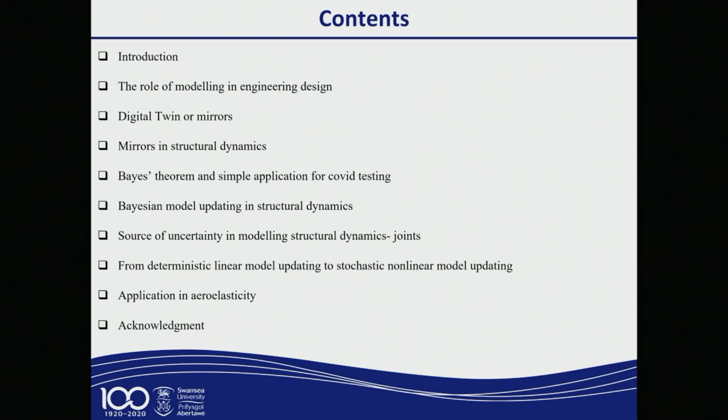I graduated from Sharif University in Iran in 2002, and I immediately was appointed as a vibration engineer. Sorry, I forgot to turn off my mobile phone. So, yeah, I started as a vibration engineer in an Industry Research Center.

I actually searched for a picture, and I found a picture of myself in 2004. This is about 18 years ago. What I was doing here, I hope I can explain in the following slides, but you can see me hammering a chassis frame with a hammer, which I will explain a little bit later.

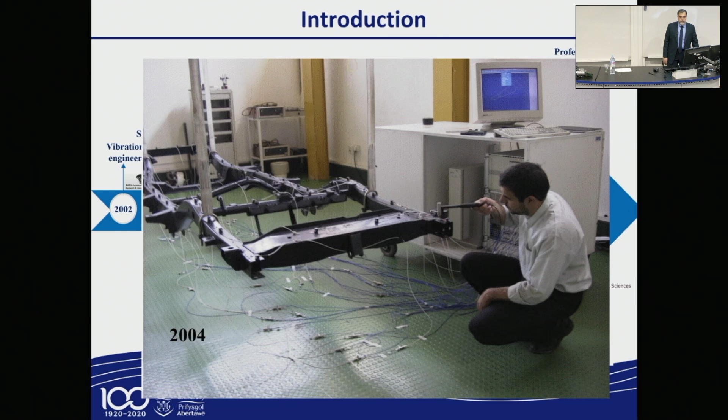I'm measuring basically the response of this structure, the chassis frame, with a system of data acquisition called LMS. I'll come back to this picture later, but I started my PhD in 2007 in Liverpool, working with the well-known Professor John Mottershead.

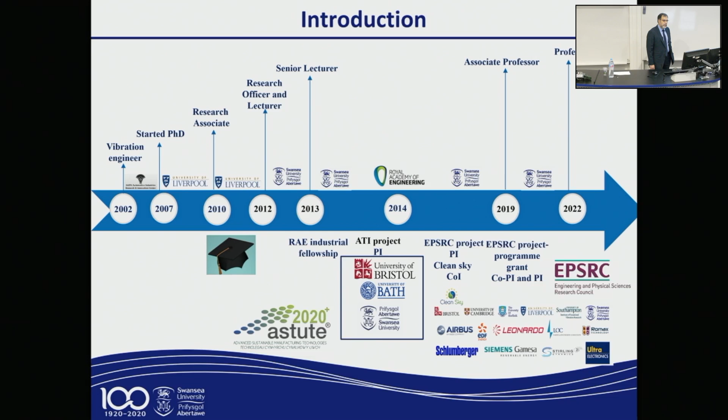And since then, I have been involved, I have won several grants. The most prestigious was the Royal Academy of Engineering Fellowship in 2014, where I worked with Airbus. More recently, I was co-PI and then PI working with Professor Friswell on the EPSRC Digital Twins for Improved Dynamics Design project. I was promoted to Associate Professor in 2019, and then this year to Professor.

Right, so before I start my talk, I would like to give you a little bit of flavor about what is the role of models in engineering design. What you can see here on the right-hand side is what we call the traditional V cycle, which basically represents a process of developing and testing a physical structure. This was called traditional because there is no modeling involved in this V cycle.

But you know that nowadays, like all areas of modern endeavor, engineering is also taking advantage of computational models in the engineering design and also over the life of the structure.

And that's represented in the left-hand side diagram by Dan Seal from Airbus, which is the concept of model-based system engineering, or MBSE, the diamond model. The bottom V is the traditional V cycle, dealing with development, delivery and manufacturing of the physical structure. What is added is the modeling, which can run in parallel with the delivery of the structure, and the circle in the middle shows the interactions between the model and the structure, used to inform the decisions an engineer makes about the structure using simulation and modeling.

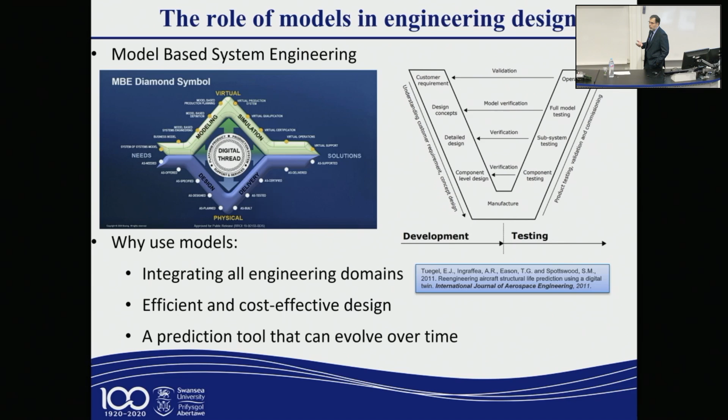The computational models can be used in all engineering domains, to improve efficiency and make the design much more cost-effective. It's basically a prediction tool that can evolve over time, and it can be used for different applications, such as structural health monitoring, where you can consistently check the health of the structure.

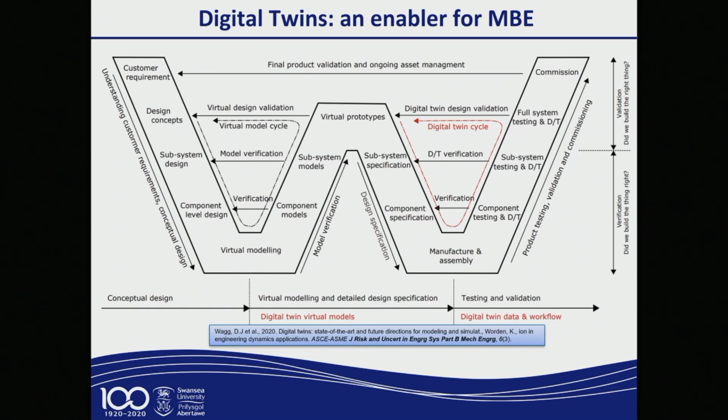There is a concept called digital twins that has been introduced for many years - I'm sure all of you have heard about digital twins. It can be considered as an enabler for model-based engineering design. The concept introduced by Professor David Wagg in this paper is to extend the V cycle to the W cycle, where you have the prototype design stage, and then use the digital twin model in the detailed design steps as a kind of cycle that informs again the decisions made about the models.

This is also shown in other concepts, but looking at the literature, there is no consensus about the definition of digital twins. There are lots of definitions, and every company, every university group will have their own definitions.

Perhaps the first use of the word digital twin was given in this paper by NASA and the US Air Force in 2012, when they introduced a digital twin as an integrated multi-physics, multi-scale simulation of a vehicle or system that uses the best available physical models, sensor updates, fleet history, etc., to mirror the life of a corresponding flying twin.

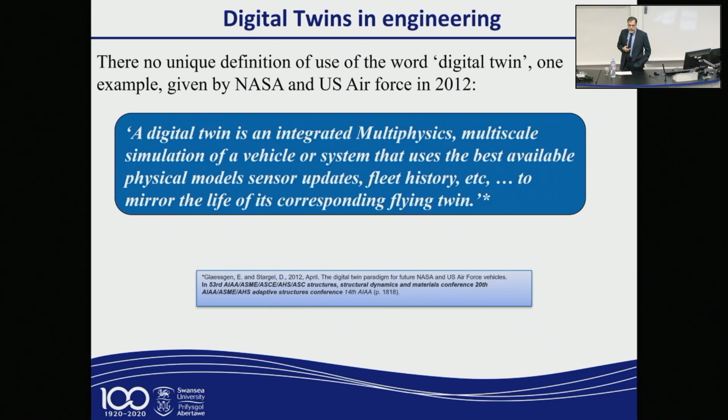And I like the word mirror here because I think that's a better definition for our application, as also introduced by Professor Keith Worden in his paper, suggesting to use the word mirror instead of digital twin. In this paper, Professor Worden has described a mathematical definition of the mirror.

That is, you have a physical structure that can be represented as S - this could be a car structure, any structure. Then you have E, which is all physical reality exterior to S. And then you have a context C for S for modeling some aspects of S, and also a schedule W for the context C. The important thing is that you have the response, which is coming from the physical structure, called T, and also the simulation, which is coming from the model.

So what is the mirror about? The mirror means that it only provides information about what is facing the mirror, what is basically shown by the mirror - nothing beyond that, and you don't get any more information. That depends on what aspect of the structure is going to be important for you.

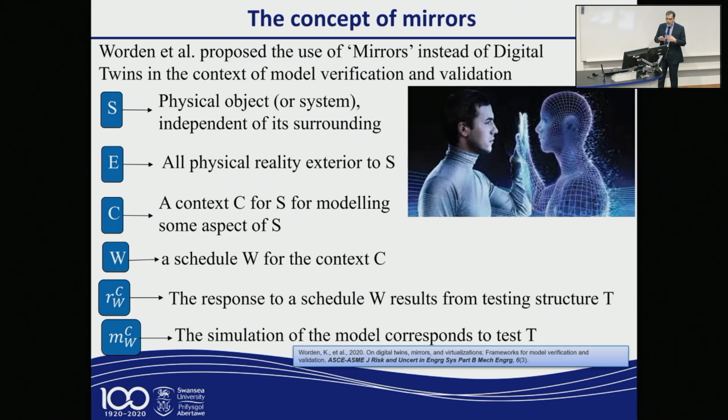To bring this into the context of my research, this abstract concept of mirror can be simply represented in this diagram, where you have a physical system. Obviously, there are environments that can change your physical system, and you have an input to the system, which I will explain in my application to dynamics and structural dynamics - what that input is.

On the other hand, you have the model, and the expectation is that if you put similar inputs to your system, the model acts like a mirror, reflecting what you see in reality. That's basically the idea of mirroring, and it's been developed since the 1970s.

The methods are called finite element model updating, validation, different names. The first book providing a good survey was written in Swansea in 1995 by Professor Friswell and Mottershead, who is now a reference in this area. It's a very common procedure in industry now to update the numerical model, and in terms of research, there's probably not much to add to what's available, since it's been used for many years.

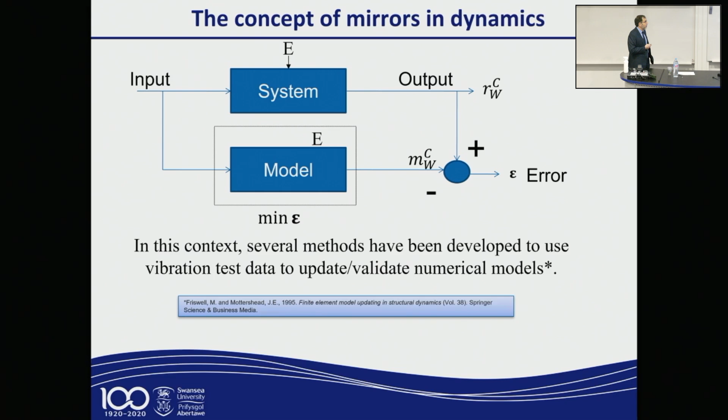Before I go through my research and how this concept is used, I showed you the first picture of myself, and now I'll talk a little about what we do in our vibration lab or dynamics lab. There are lots of works we're doing, but the simplest one is modal testing.

Remember the previous diagrams where I talked about input and output. Modal analysis and testing is a process where we apply a force to a structure and measure the response of the structure using an accelerometer. That's what we do in modal testing.

If we assume the structure is linear, which is more or less the assumption made in industry, then the ratio of output to input represents an FRF curve, the response in the frequency domain, which shows peaks at certain frequencies we call natural frequency or resonance frequency. These are independent of the input and output; they only represent the properties of your system.

The input could be a hammer or a shaker, measured by something called a force sensor. The output could be accelerometers, a vibration sensor, a laser displacement, or laser vibrometer - we have all this equipment in our lab. The important point is that if the structure is linear, these curves become independent of your input-output; the ratio is always constant and represents the properties of the structure.

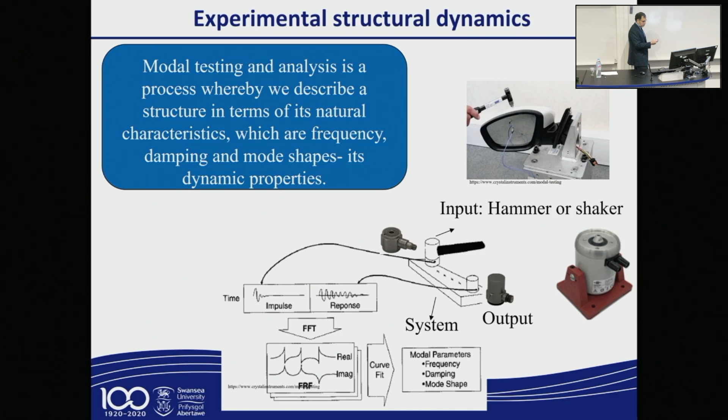Let me explain resonance frequency for those not familiar with structural dynamics. We have two types of force: static force, which applies to the structure without any frequency, and as you increase the level of force, you see more effect, like more displacement. So in the simple case, I apply a force here and get displacement, and as I increase the force, the displacement increases.

But the force could be sinusoidal, with a frequency associated with it. The level of force can remain constant, but the frequency can change. If you apply that force using a shaker to a simple plate, as you increase the oscillating frequency, at some point you see a great jump in the response - that's the natural frequency in the frequency domain.

Each natural frequency of the structure corresponds to a shape. Living in Swansea, a windy city, you probably see beams vibrating in the streets - that's basically the first bending mode of those columns around you, which is the first resonance frequency. As you go to higher frequency, you see more complicated shapes.

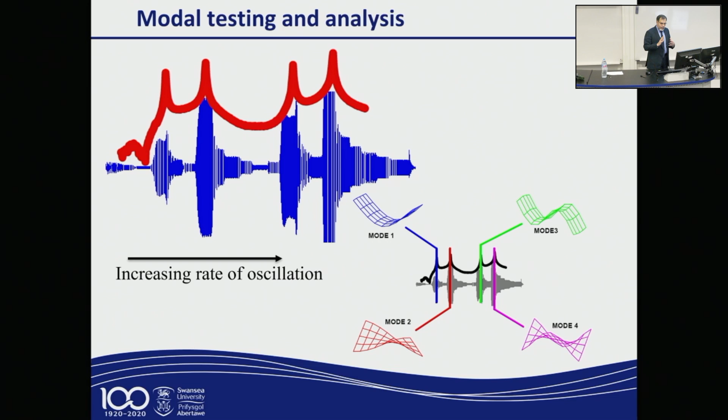Depending on the excitation frequency, these shapes can become more complex, but normally we don't excite structures with those high frequencies, so we only consider a certain number of modes in our analysis. That hopefully gives you a bit of understanding of what we mean by frequency and resonance frequency.

Now going back to the concept of the mirror and its application in model updating: you have a physical structure, and we can test it. Obviously there's lots of uncertainty associated with those tests, so you have to repeat the test. But normally, if you assume a single structure tested in a controlled environment, controlling temperature and everything...

So you expect, for example, if you measure only two natural frequencies, only one point in the plane of the first and second natural frequency - that's what you expect.

Obviously, in reality, you have to do a lot of statistical analysis to end up with this one point. But let's agree that this point is representative of the first and second natural frequency of the structure. So now we want to make a model which basically represents these test data.

And obviously, we use our knowledge. We make a computational model of that real structure, and we simulate the real structure, and we get a point in the same plane, but not at the same location as the real structure. Now the question is, what did we do wrong in terms of the modeling that we see these discrepancies?

That's basically the question that's going to be answered by researchers in different ways. Obviously, the computational modelers always say we increase the fidelity of the computational models, and we can then include more physics to basically minimize these discrepancies. But that's not always the case for all applications.

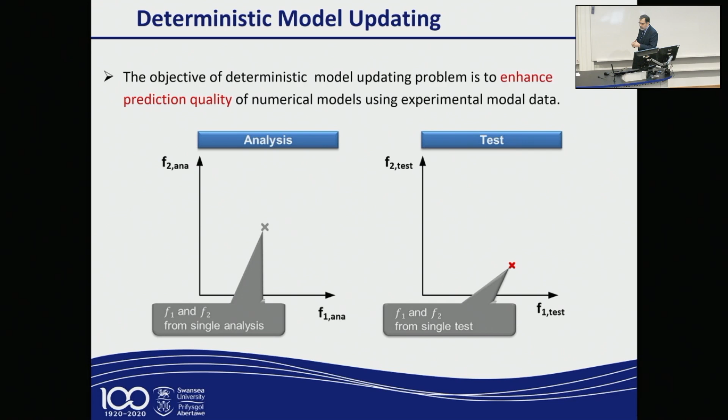What was my contribution during the PhD and postdoc was developing methods to consider multiple structures. So I mentioned that we consider not only one structure. If you consider a car coming out of a production line, or an aircraft structure, you don't have one car, you have multiple cars, all with the same design, and they all try to manufacture it in the same way.

But eventually what you see, if you do the test, minimizing the uncertainty for every single structure, you don't end up with one point in that plane. What you get is several points. Moreover, this structure is supposed to work in different environments. So you make an aircraft, and it's going to fly in different countries with different environments, and those environmental parameters will also change your structural parameters.

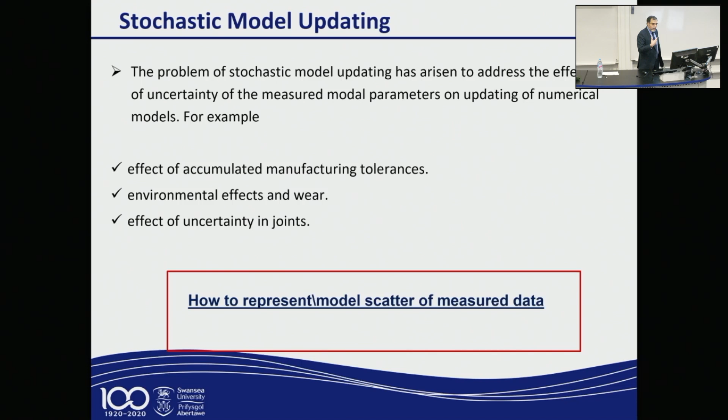So the question I basically tried to answer was, in the same plane we now have multiple points, which we call the clouds of frequencies. This could represent the variability not only due to the different multiple structures, but also due to the environmental variability. Now you have to make your model which predicts these scatters.

And this is where we introduce stochastic model updating, that's where SMU comes into play. This paper, written by myself, Professor Mottershead, and Professor Friswell in 2008, was one of the first papers which described this concept. The objective here is not only to minimize the center of these clouds, but also to minimize the size and the orientation.

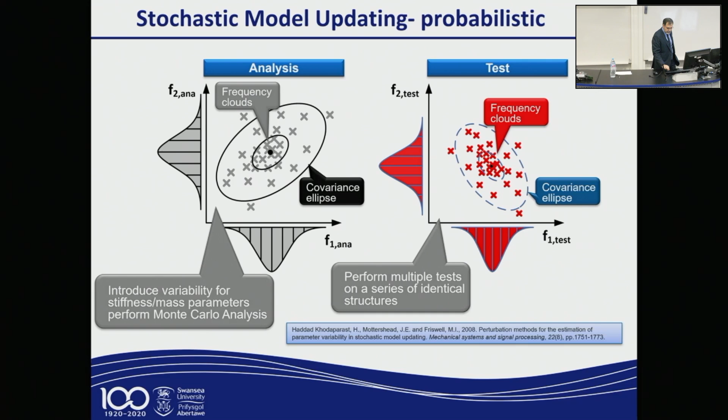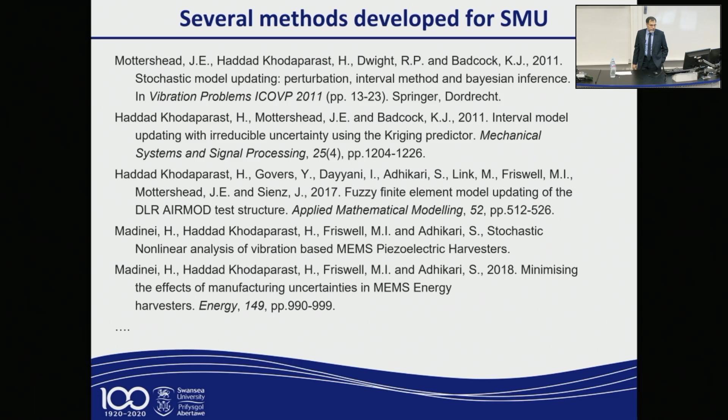This involves a bit of detail in the statistics, and I'm going to just skip that. There have been many methods developed for stochastic model updating, mainly for linear structures, and several papers have been published. Some of them are from us, but many from other institutes.

But amongst all those methods that have been developed, Bayes' theorem proved to be the most powerful technique in our application, which has also shown to be very useful in other applications. But because its theory is probably a bit out of scope for my presentation today, I'm going to give a very simple example that I used in 2020 for a COVID-19 application. It's not engineering, but hopefully it gives you a bit of understanding about the concept.

And based on that, you can improve your confidence about the probability of that proposition. I'm going to say this in a very simple way, using the example that I did and sent to NHS.

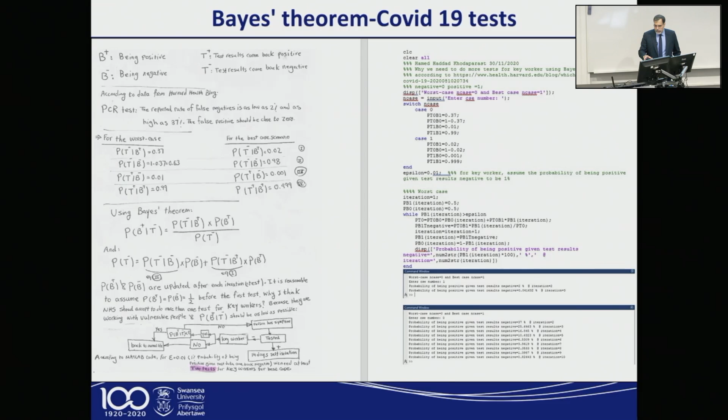So I defined 2 scenarios: one is the worst case, and the other is the best case. I did all these calculations, which are simple, and I'll show this curve, which is the important one and very intuitive.

It's basically saying my starting point before doing any test is 50%. When I do the first test, in the worst case scenario the probability of false negative reduces to 37%, because this is only based on the information available. In the best case, it reduces almost to 0. So NHS always takes the best case.

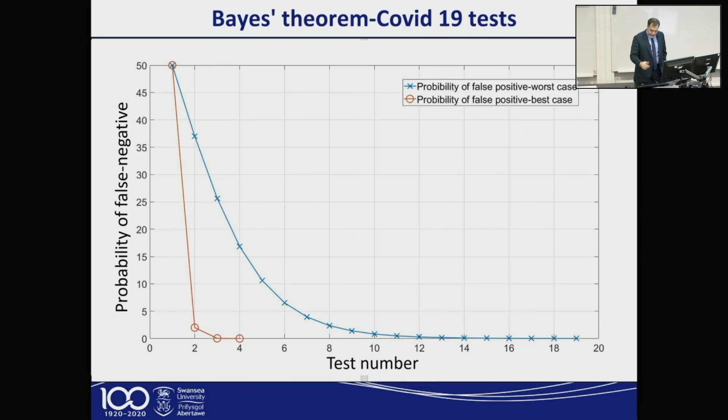But if you take somewhere in between, let's say here, then probably we need at least 1 or 2 tests to reduce this probability of false negative to a reasonable value. Hopefully that gives you an understanding of the concept of the Bayesian theorem.

In our application, going back to this slide, we use this for experimental test data to improve the probability of the parameters that you assign into the stochastic model that predicts the probability of the measurement data. So that's the whole idea, to give you the big picture.

And this is the equation. I promise I won't go into any detailed equation. You can see it's a similar equation, but the application is in engineering and structural dynamics. The pioneer of this idea is Professor Beck, who introduced it in his first paper, but our contribution was extending this method to the case of SMU, or stochastic model updating.

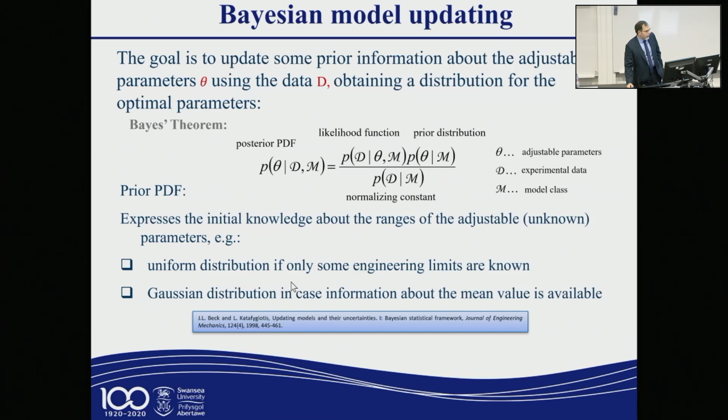There are some slides here about how to estimate your prior and how to calculate it. Obviously, when dealing with models, you can't just use simple calculations like multiplication. You need to use computers to calculate all of this analysis.

I just show here some of the things - for example, to identify the posterior, we normally use the MCMC method. The posterior and prior, again, I have to clarify: the prior is what you estimate, and the posterior is basically the improved probability. You can actually do this in an iterative way. Okay, so let's move on.

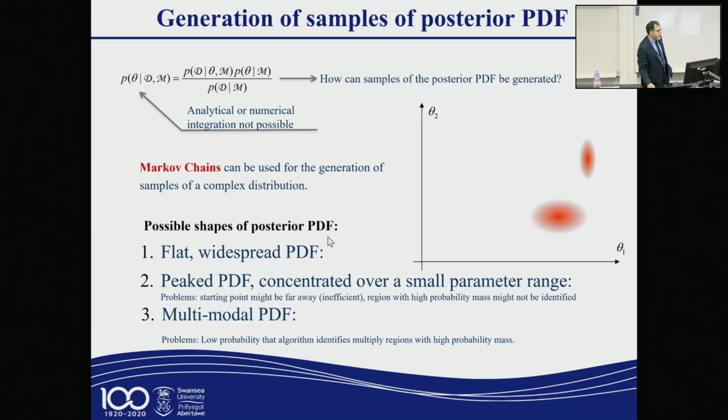I'm going to show you some of the results that we got from these methods that we have developed. This is a collaboration with German Aerospace Center where we wanted to demonstrate the application of the methods that we develop in this area.

When it comes to academia, we have limited resources, so we can't really test a very complicated structure. We have to make benchmarks to test our methods or ideas. This is what is called the DLR AIRMOD structure.

What they try to do is see what would be the effect of different sources of uncertainty in the vibration test data. They found that assembling and reassembling the structure will have the maximum effect on the variability. What you can see here is some data on the natural frequency that I mentioned.

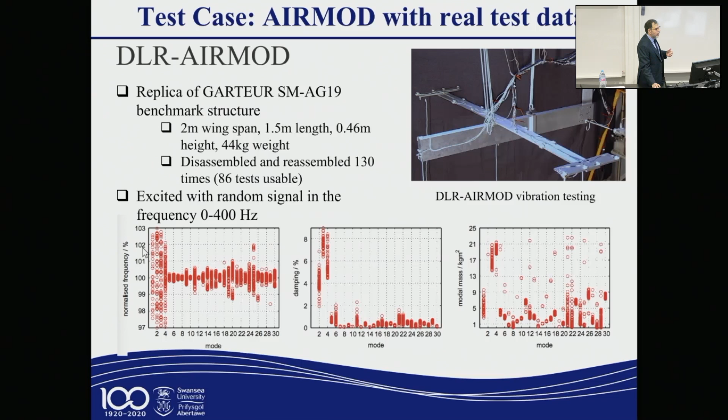In reality, every structure has an infinite number of natural frequencies. But as I said, in reality we're only dealing with a limited number of frequencies, in this case 30. You can see the variability due to the assembly for different assembly and reassembling of the structure.

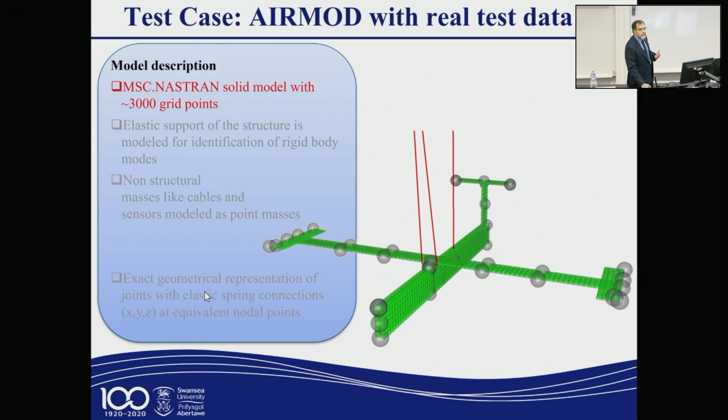We now have a model which mirrors or reflects the physical structure. We assume that there are some parameters within this model that we are not sure about, and we want to adjust them using different methods that we try.

When you do the experimental modal analysis, you can extract the mode shapes. These are the mode shapes of these aircraft structures. Every structure has its own mode shape. That's one of the analyses that is carried out in reality.

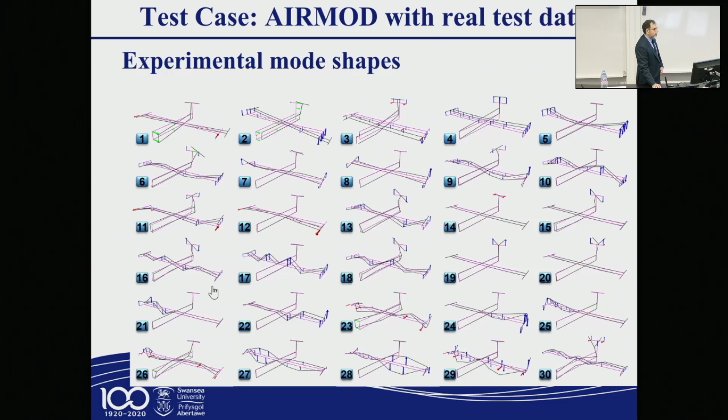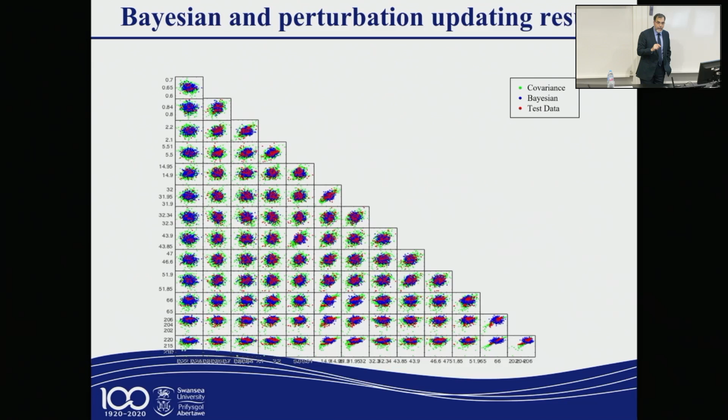As I said, in this one we use 86 sets of measurement data for the methods that we develop, and we demonstrated that the method can predict the scatter of the data from the experiment very well, both covariance and Bayesian.

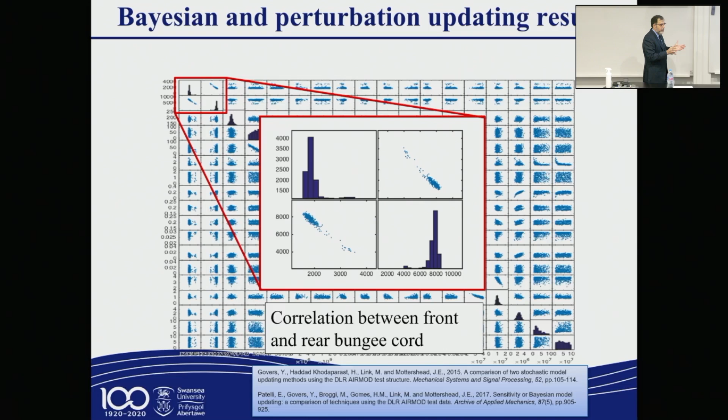The advantage of the Bayesian approach is that you can also see some things in the input parameters, the probability, because the perturbation method that I developed could only show the range, the variability in the parameters. But with Bayesian, you can also identify the probability of the input parameters in the model. That becomes very important, especially when you have bimodal behavior.

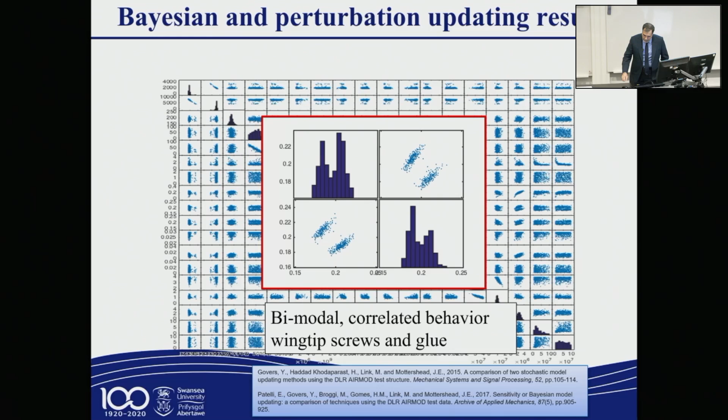I mentioned about the joint. As I said, there have been many methods developed in the past decade, and it's mainly concentrated on improving the efficiency of these methods.

But one of the questions that always remains in the literature is: where is the source of the uncertainty in different applications? Where does that doubt come from? In our application, obviously, we know that a structure is made of different parts, and they all get assembled. This assembly process can bring variability in the results.

But also, when you have joints in the structure, which are simply represented here, the joints can also cause nonlinearity in the response. I talked about the linear response, where the output to the input ratio remains constant. But when you have nonlinearity, that constant assumption is no longer valid.

What will happen is you have some phenomena like friction or slipping between the surfaces, or you can have separations between the joints. All those phenomena can create nonlinearity, and this nonlinearity will result in input-dependent natural frequency.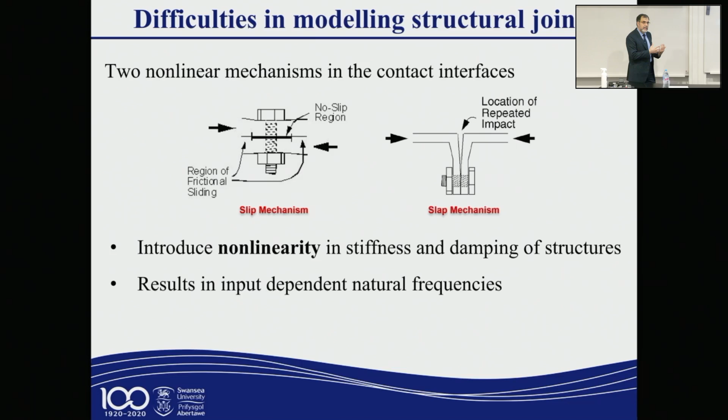With my colleagues and my PhD students, we have published several works on what we call deterministic methods. Consider that now the response for a single structure, instead of one point for one frequency, is a number of curves which are called backbone curves.

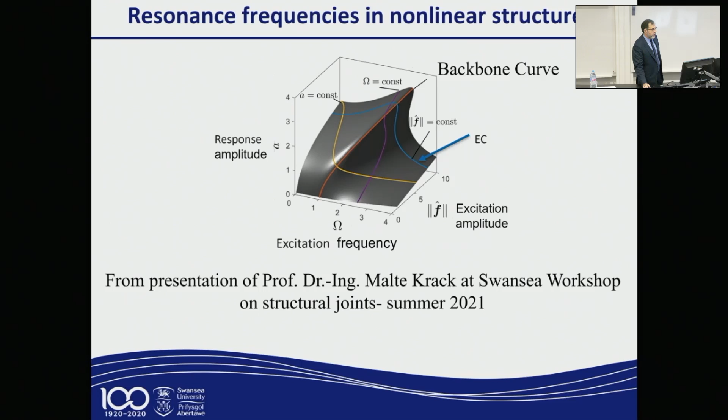And now you have to use this backbone curve to modify or identify the nonlinear model in the structures. These are a list of papers, not just us, many other groups working on it, to develop methods for what we call deterministic nonlinear model updating. And it's still going on.

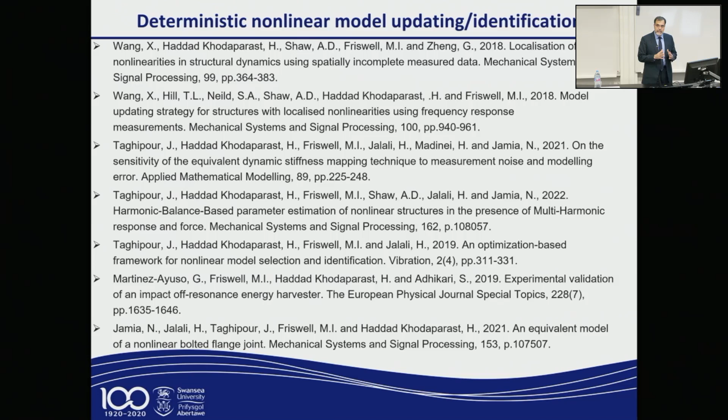But in my EPSRC project in 2017, we actually said it's too early to move into nonlinearity, and we still have a lot of lack of knowledge, even in the linear structures with the joints. Because I mentioned about the difficulties in modeling of the joint structures.

And the reason is because you have a randomness in the asperities contacting the two surfaces. This randomness could be completely different from one structure to the other, and it's almost impossible to model this at the microscale. So we proposed the idea of making an equivalent model which can represent this randomness in the microscale, but still dealing in the linear region.

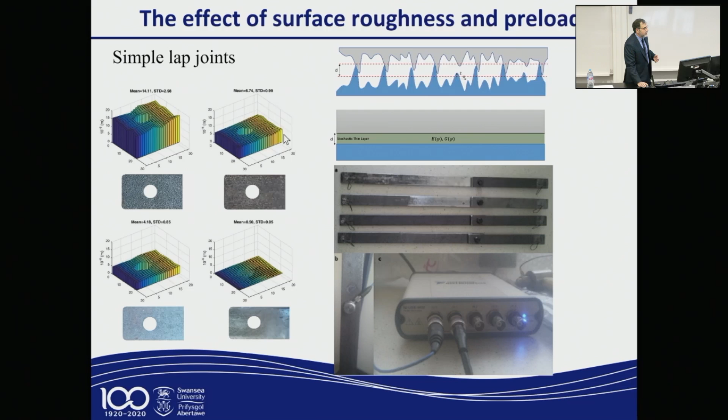And in order to test this idea, we made 4 surfaces. Again, we have limited budgets - it's better to make as many as you can, but that's what we could do. 4 structures, with different surface roughness that we could measure, and we did the experiment.

And apart from the modeling, which I'm not going into the details of, we could see great variability, not only in the frequencies of the structures, but also in the damping ratio, which is also another important aspect. We published a paper in JSV, one of the most prestigious journals in the field.

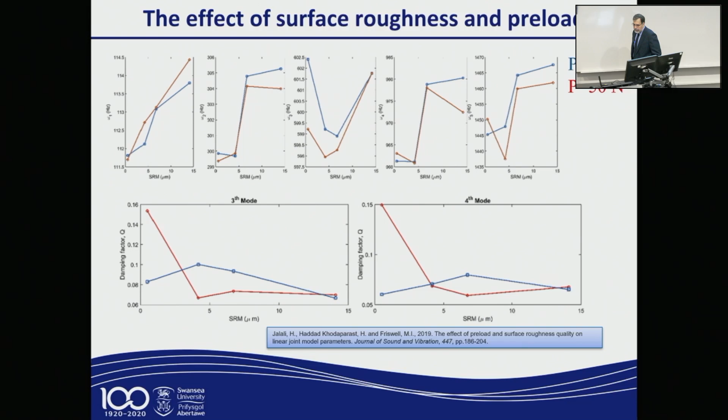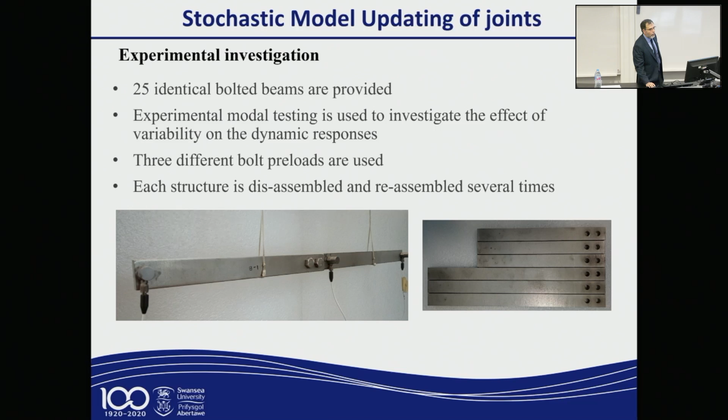And that work was continued by basically doing this experiment on a different set of structures, with 25 different combinations of these simple lap joints, still assuming we only excite the linear modes, and changing the preloads on the structure and repeating the hammer test.

And that's like 75 tests, but not only 75 tests, because every test has averaging. So you have to imagine every test takes at least 10 averages. Hadi here in the lab was there during those times to do all these tests, and it took about 20 days to complete.

And this data, coming from that exercise, is quite useful because it shows the frequencies of this simple structure, but not only the frequencies, also the scatter of these frequencies. And you can imagine these results are quite intuitive, because as you tighten the bolts, you stiffen the structure, and the stiffness increases the natural frequency. So you can see the center of this scatter moves and shows the increase.

And that's not something to surprise, but you can also see that the level of variability and uncertainty reduced - as you can see, the size of this scatter reduced. And these are real experimental data. It's nothing from the model.

On the other hand, we saw something in the damping: by reducing the preload on the joints, the uncertainty, or variability, in the damping ratio will increase. And as you tighten up, the variability reduces.

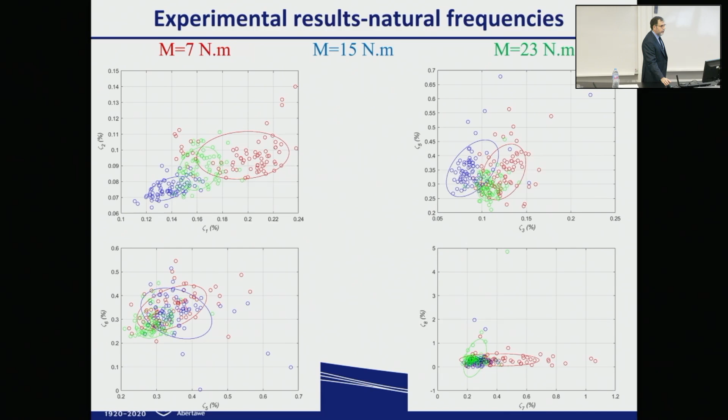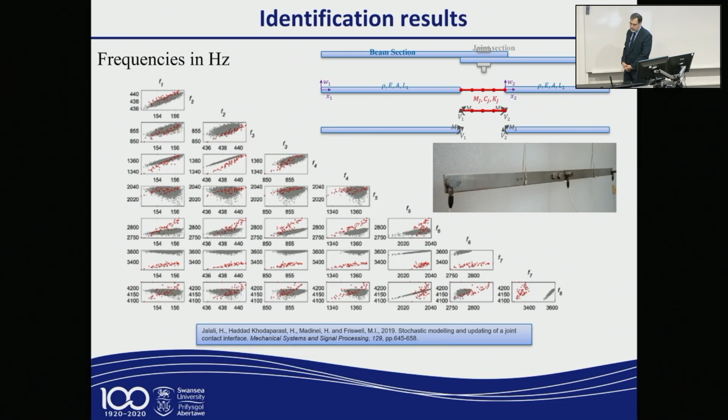And we basically said, okay, we can use the computational model and the Bayesian updating approach, and we showed that the method can work well, especially in the low frequency regions. We published another paper in MSSP.

So I'm going to talk a little bit about the work we are recently doing on this. As I said, with Dr. Nidhal, who is also here, a research officer at Swansea University, we have done a lot of work on modeling nonlinearity and also identifying the nonlinearity in the joints.

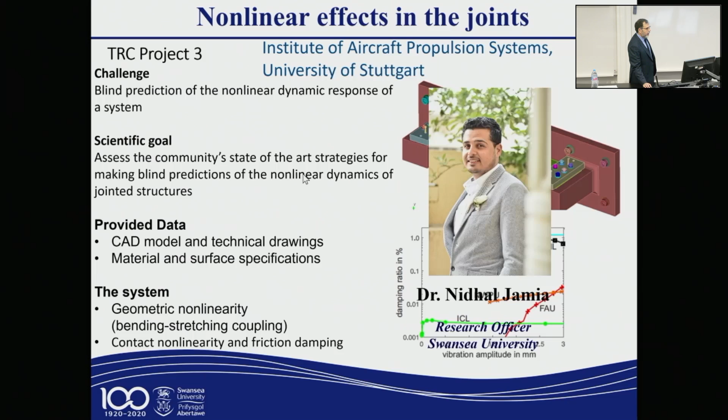But this was quite an interesting exercise, designed to show the level of uncertainty in the modeling of even a very simple structure, like the one you can see here. So what was the task? The task was basically designed to do a blind prediction of the nonlinear dynamic response of a system.

So what you can see here is a simple plate bolted and clamped at two ends. The goal was for different institutes, including Swansea University, as part of the structural joints community, to perform their own modeling with the given data and provide estimations of the damping and frequency. We only reported damping here, and you can see great variability in the damping estimates from different institutes. It shows that the level of confidence we sometimes have in the model is quite low, especially for a very simple model like this.

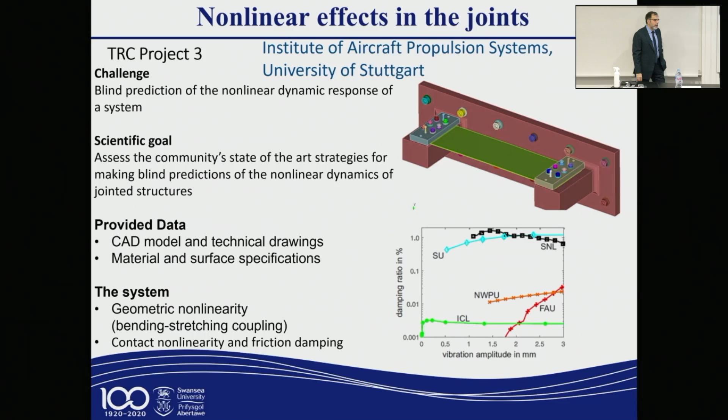Obviously, the one that used a very detailed model was Sandia lab. Last month, several researchers from us, including Dr. Nidhal, went to Stuttgart and spent about a month doing a lot of interesting experiments. This is the test rig shown at their institute, and I think we are trying to make something similar in Swansea at the moment.

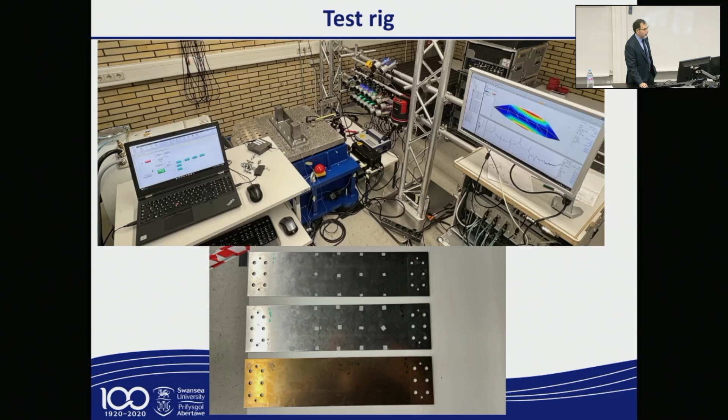The idea is that we now measure the mode shapes. You have three different plates attached here, and you can see all the sensors used for measuring the modes and natural frequencies. But what's important here is that these are all experimental data, and what you can see is something called a backbone curve.

The natural frequency, W hat, is plotted against the base level of the base excitation. So instead of force, you increase the amplitude of the base excitation, and as you do, you should see some nonlinearity. Initially, the natural frequency reduces because of some friction and loosening in the stiffness, but then the geometric nonlinearity, which is a hardening nonlinearity, becomes dominant and you see an increase.

But in the frequency, you can see in the linear regions there is still variability across the three structures, and that level of variability increases as you go to higher levels of input excitation. The same happens with damping, except damping is always more uncertain because the range of variability is always quite big.

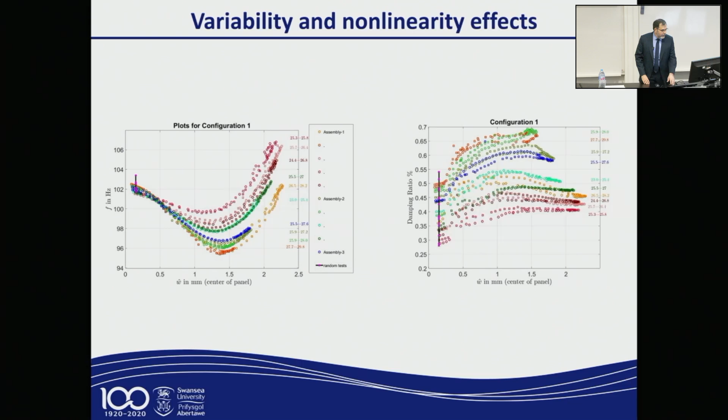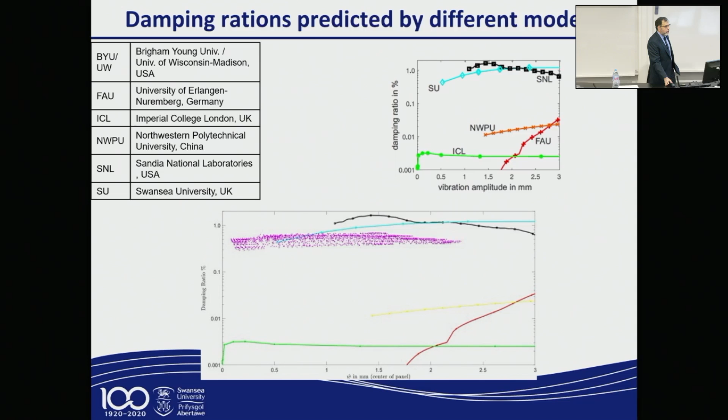But what you see here is not a single curve. I mentioned that what we're doing now is deterministic nonlinear model updating, trying to develop a model that represents what we could call the mean. But in reality, this scatter in the nonlinear regime is meaningful. The idea now is to develop methods - and this is current research that many groups are working on, not just ours - to predict also this variability in the nonlinear region.

Pushpa Pandey, who is also here, is working on this idea. We came up with defining the likelihood function in a Bayesian approach by fitting a PDF at different locations on the backbone curve. Pushpa actually presented this work two weeks ago at ISMA in Leuven, for the first time presenting her work there. We showed some results, but not using experimental data - only simulations, which we used to produce data to show that the method is working.

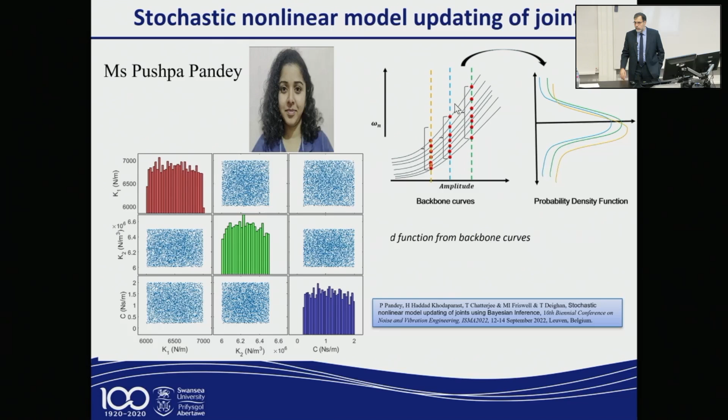So that's all about structural dynamics. Now I come to aeroelasticity, which is also my interest. This is work we did with Airbus and also in Swansea University wind tunnel. Davide Balatti, a PhD student - his name is Balatti - started this idea while at Airbus.

We now have lots of advantages from high aspect ratio wings - it can save fuel and significantly improve the lift over drag ratio. But there are limitations at airports, because as you increase the length of the wing, the aircraft might not fit in many places. What you need is a folding wing, so once you land, you can fold the wing and fit it wherever you want.

The idea started in Airbus, to say why not assume the winglet can basically move when the aircraft encounters gusts. The gust is something you all probably experience in an aircraft - you experience the effect of turbulence, which is not really pleasant. It's quite annoying, and as a designer you would like to minimize those effects on the passengers. You need something like isolators to remove that.

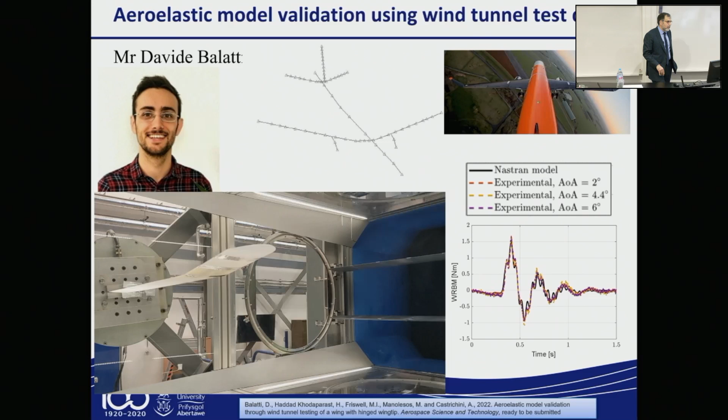This is the demonstrator here. On top of this we have laser sensors which measure the displacement at different locations. It's been shown in many applications that this can work, but as I said, it's mainly still at a low technology readiness level - it's not something we can build in yet. There's still a lot of investigation going on.

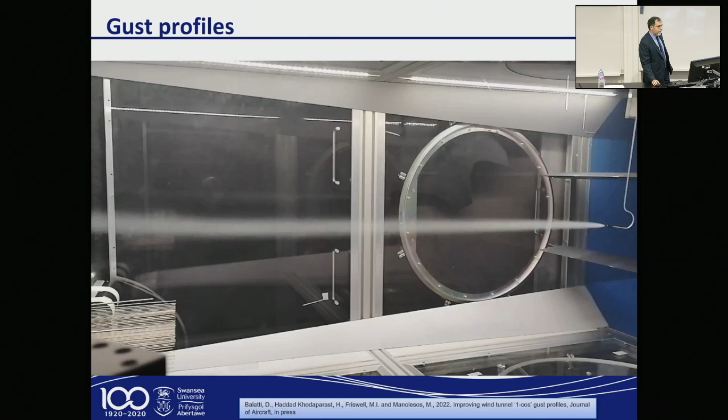Going back to the concept of resonance frequency I mentioned - it's something we always use, the frequencies of the wing, shown here. In the aeroelastic case, when you have the wing and the air together around it, the frequency becomes a function of the velocity, even in the linear case, even if you have linear structures. As an aircraft designer, you always have to make sure your aircraft is free from flutter.

In this video we go the other way around - we show the flutter, and then we reduce the speed. That's something you don't really want to see in the aircraft. Then when we reduce it, you can see that we go to the steady state condition.

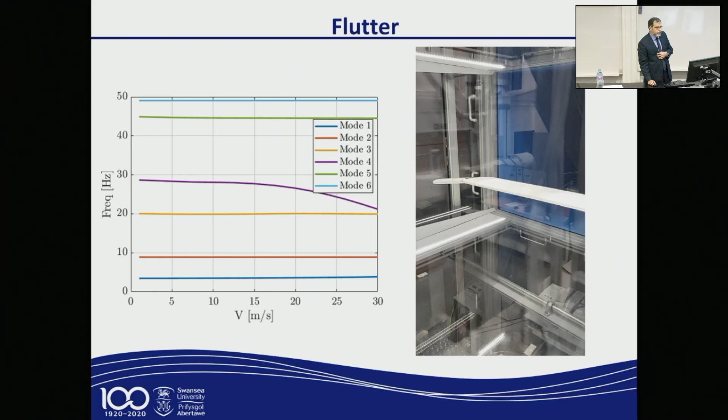I think I've come to the end of my talk, so I'll give a few words about the Swansea Vibration Lab, Dynamics Lab, and Wind Tunnel Lab. We have lots of equipment, and I hope these presentations can create some common interest. With the IRIs, we can also talk to other colleagues to see if there are common interests, and all this expensive equipment can also be used by other researchers in different departments - I think the faculty could help with this very well.

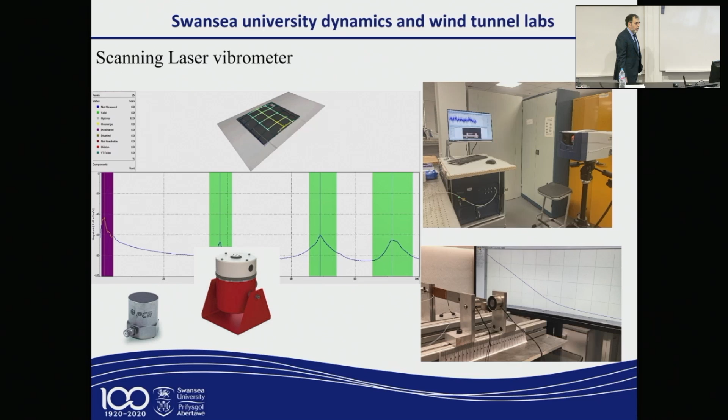You can see pictures of the scanning laser vibrometer. Dr. Azizi, an impact research fellow working with us since last year, has used this, and you can see examples of how this scanning laser vibrometer can measure the mode shapes. We also have lots of shakers, base excitation shakers, PCBs, and other sensors like lasers and displacement sensors, which can be used either in the wind tunnel or in the structural lab.

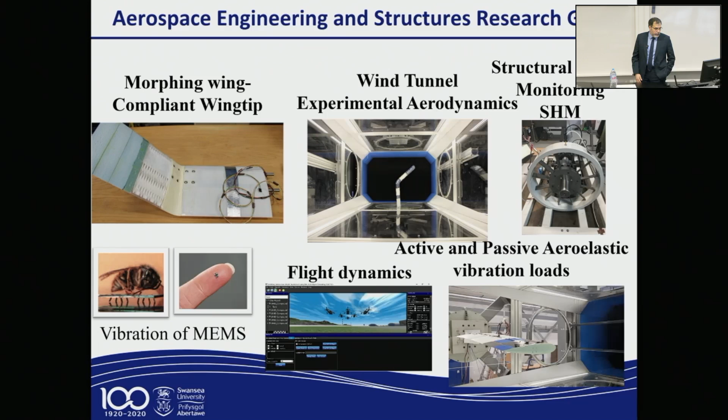I would like to thank all the people who basically worked with me in the past few years, and some of them are now working in different organizations, either as lecturers or assistants. I think it's very good to hear that people who work with you progress in their career and move on to the next stage of academic development. I would like to also thank all of my line managers, mentors, and advisors in the past 12 years.

Unfortunately, I lost one of them. The second one passed away last year because of COVID. I would like to also give my great acknowledgement to Professor Friswell, who was here and helped me during the last 10 years to develop my career, and thanks to all the other mentors and advisors. Thank you very much for your attention, and I hope that gives you a little bit of flavor of what we are doing in our research. Thank you very much.

Thank you very much, very interesting. Many things in there. I'm pleased that you publish in my journal as well, and that you beat Imperial College in your model. We haven't got much time for questions. Are there one or two questions which we could look at?